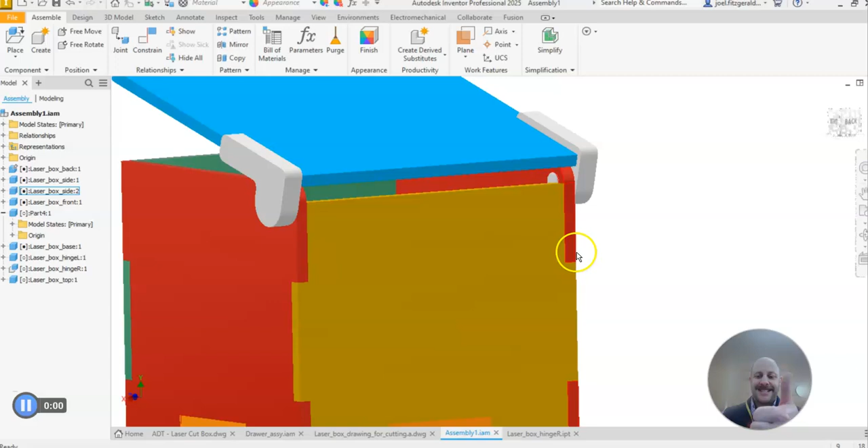In this short video, I'm going to show you how to put together your box in what we call an assembly. This is an environment that allows us to bring our parts in, check to make sure they fit together, and if you're lucky and it works well, you can also do some little animations by clicking and moving your objects.

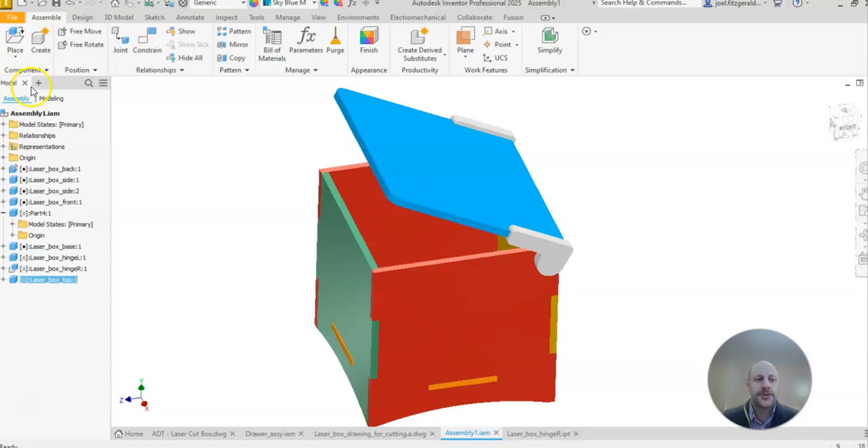To start with, you may have a file already in your file set that has an assembly on there. I'm going to show you how to create a new one. We go start with new, this little icon here. Make sure you're in metric. We're not going to create a part, we're going to come down to assemblies. So you need the standard millimeters.iam. Press create. In this blank environment, we're going to start placing our parts.

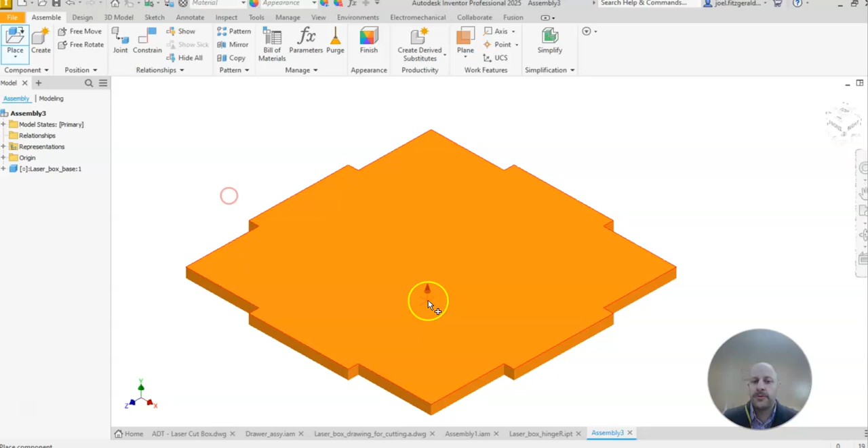So our box, you can refer to the drawing. I'd like you to start with the base. This is the base here. Let's just click and place that in our assembly. You notice the view will change to a 3D view. We need just one of these. We're going to go ahead and start adding the other parts.

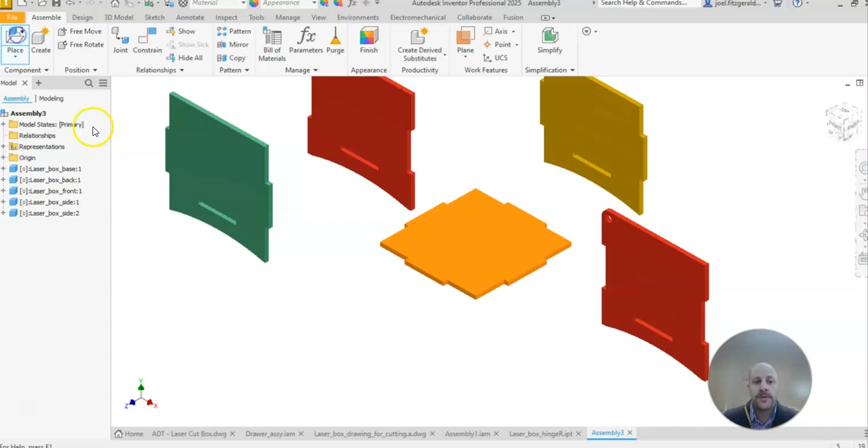So our box is going to need a back. Open this one, just place it randomly. It's going to also need a front, place it randomly. It's going to need some sides. Now remember from the drawing, there's two of these, so click 2. We also need the lid - top, or the lid we've called it. Just put this randomly inside here. And we also have a series of hinges, hinge left and hinge right. So place these in here, right click and press OK to hop out of that one.

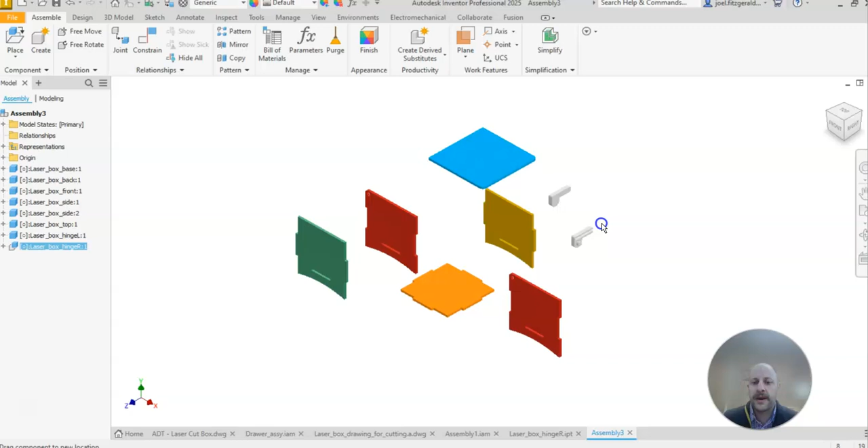You're going to see here that these are your parts. When you first put these in, you can click and move these however you would like. So it might help you to start with to move these where they are going to go. The front of the box is green, so I'm going to leave that one there. This is going to be the front. There's my base, back, two sides, and the top. There's also a command here called free rotate, so it might help you in the first instance to rotate these so they roughly look in place.

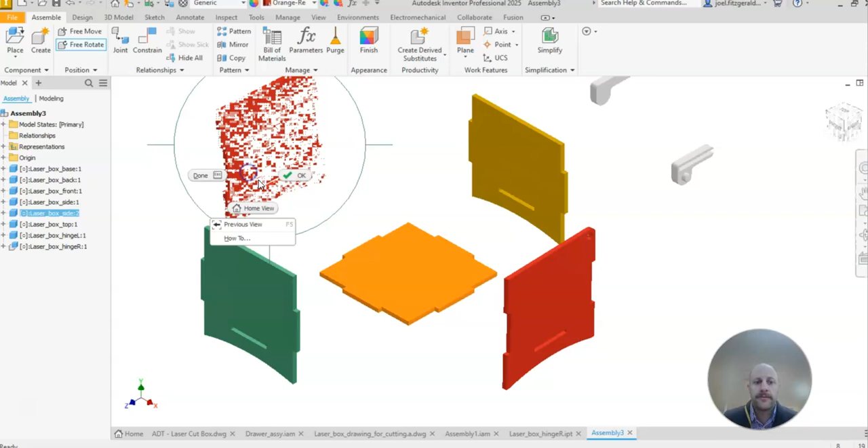So from our drawing, the hole for the hinges go at the back of the box. Right click and press OK. I'm going to free rotate, click this one and go free rotate, move that one, right click and go OK. Now it doesn't matter if these are rough to start with. I always like to get these in position so the radius is at the front, sort of how it's going to go together.

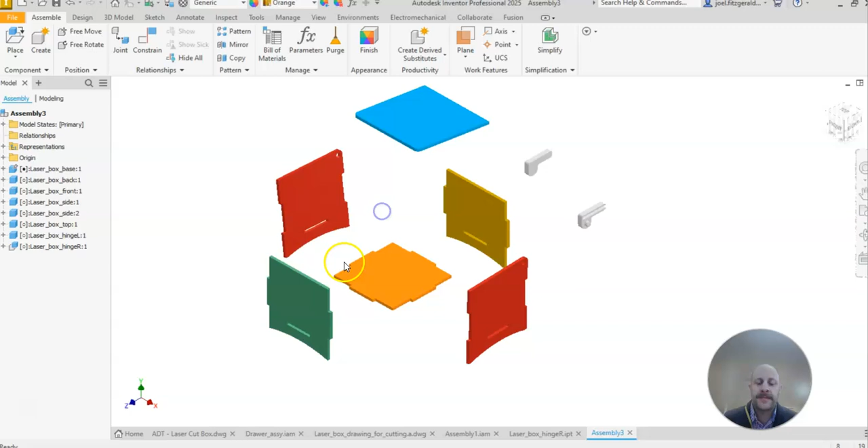Now, the first thing I want you guys to do is to right click the base. What we want to do is make this fixed. So with your mouse, right click and go grounded. That stops this one from moving and allows us to now build our box onto it.

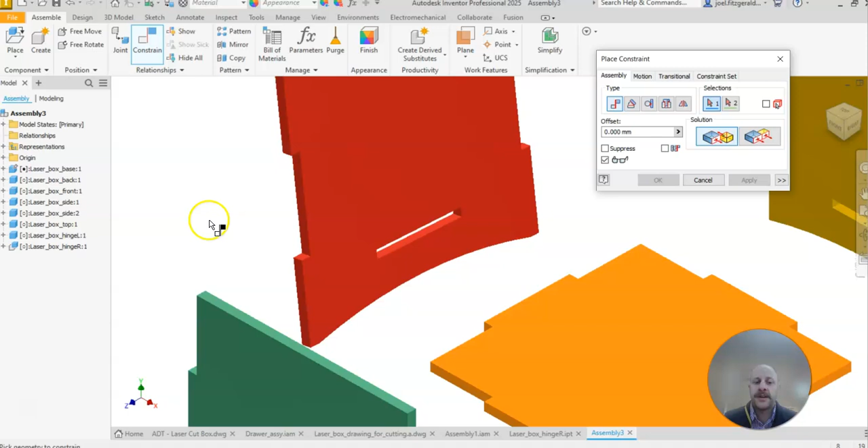So the clever tool we're going to use in here is we're going to create what's called a constraint, a whole series of constraints. In this tool is some pretty intuitive little things here. I'm going to use the mate constraint. What we're going to do is we're going to start clicking faces and create some relationships between them.

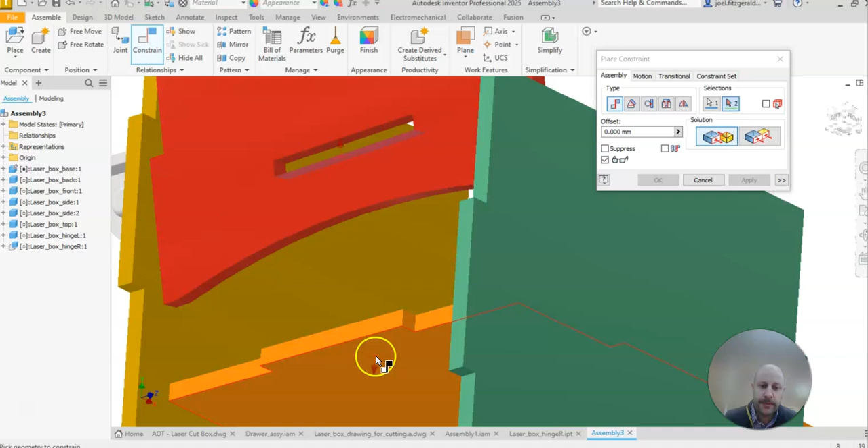So for example, I'm going to start with this side and I'm going to click, let's say this bottom face. Please be careful here, don't click on edges, try to use faces wherever you can. Now with a bit of cleverness to rotate your model, I'm going to say that bottom face is going to touch on this bottom face of my part. That's going to give you a bit of a preview. That looks good, and press apply. Now what that's going to do is create a relationship between those two parts.

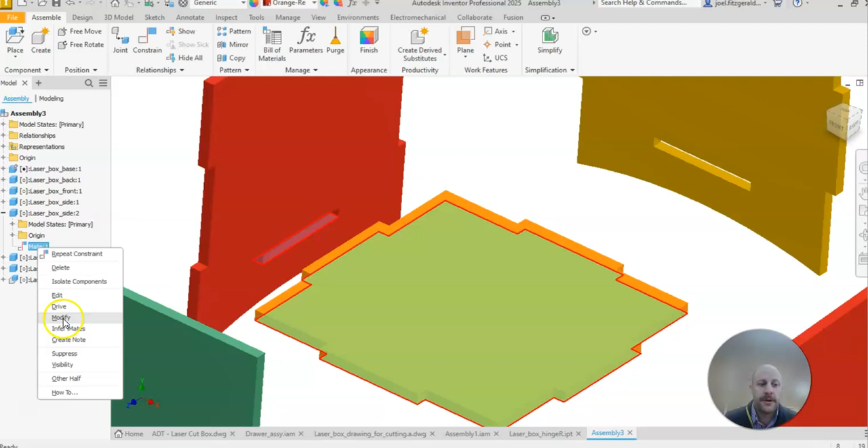If I just press cancel out of there, if I start moving this now, this is going to move according to that mate I've just applied. You can also expand here and see that was the mate between the bottom face and that face. If it's the wrong one or an error, you can always right click and press suppress - press to turn it off, or delete here to completely remove it. So what we need to do is start putting these relationships between our parts according to how it should fit.

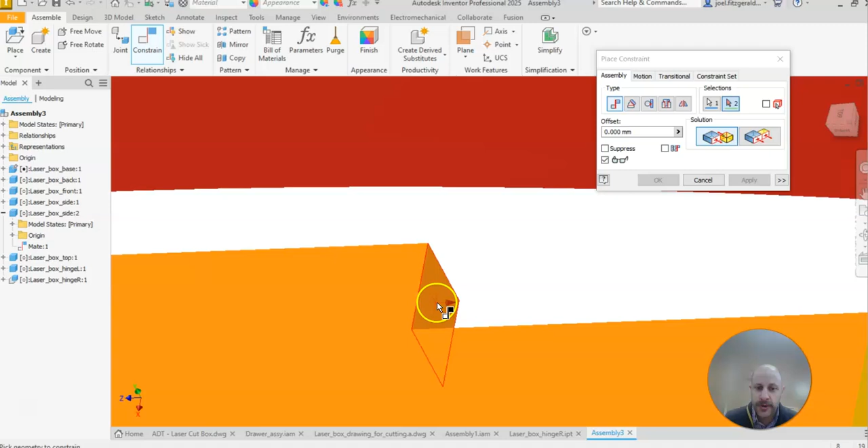So another one we're going to apply is, let's say, this face here of the side - that should be touching this face here. So remember again, zoom in, click on the face. It's going to put those together.

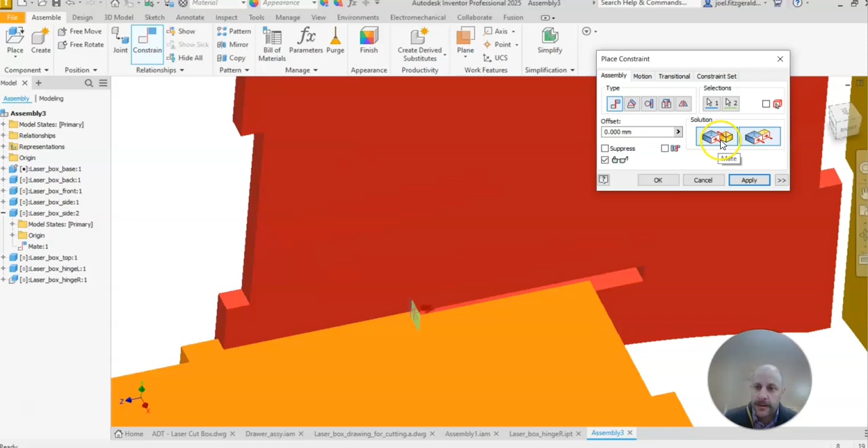Every now and then, what is possible is that there are two options for these. You can click on the two options. It's a little bit hard to maybe understand this, but these two faces can touch in two different ways - so that way there, and also if I press on the other one, it can flip it over and those faces are still touching. So if something comes out weird, try pressing on this alternate solution. That looks how I want it. I'm going to go OK.

The last one I'm going to do is say constrain. I'm going to choose this whole front face, and that whole front face will sit against here and go okay. Excellent. All right, that shows these together.

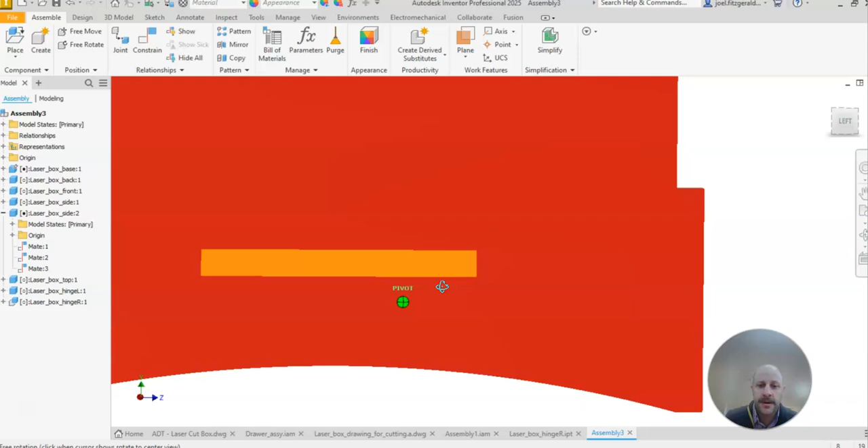You will notice that there's a little bit of an overlap with our parts. This is because when we laser cut these, I've already determined that the laser cutting lines removes a bit of material. So a little bit of interference, we call it, between these parts is okay. But what we're mainly looking for is ensuring that all the corners line up.

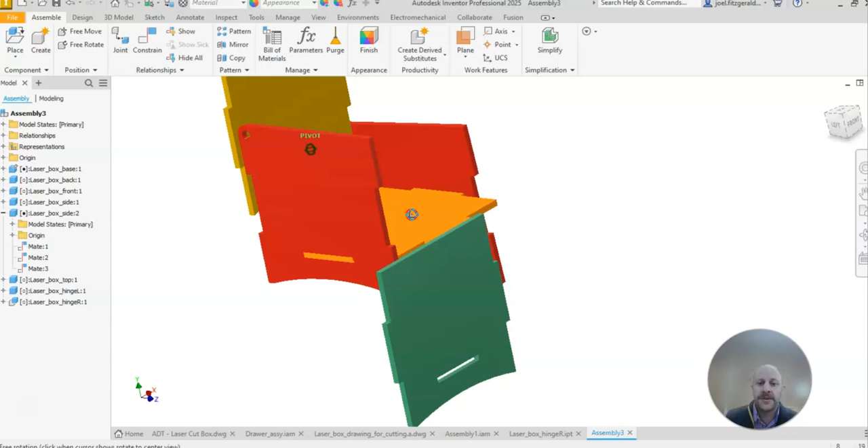Okay, so part by part, let's apply those. I'm going to do one more and then you're going to do the rest. So constrain, let's put the back piece on. So I know that, let's start with this face. That face there should be touching on this face here. Apply.

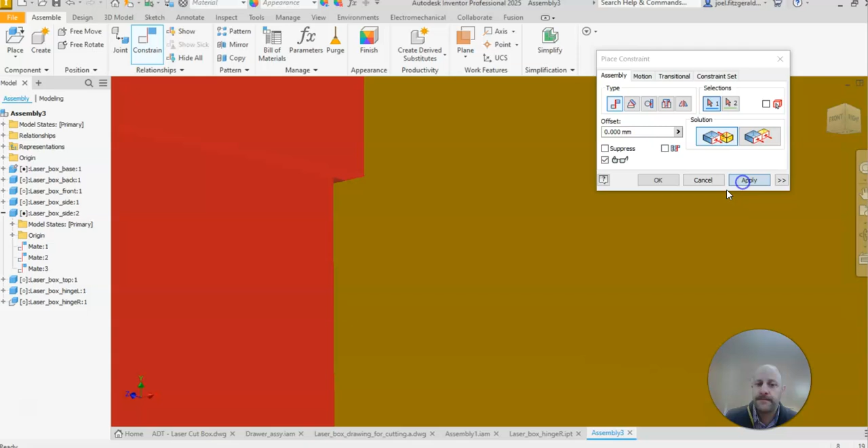What else? That face there should be, whoop, I can't quite see it. I'm just going to move this out of the way to make sure I can get to it. So this face here touches on this face here. Apply. And I can just move this out of the way.

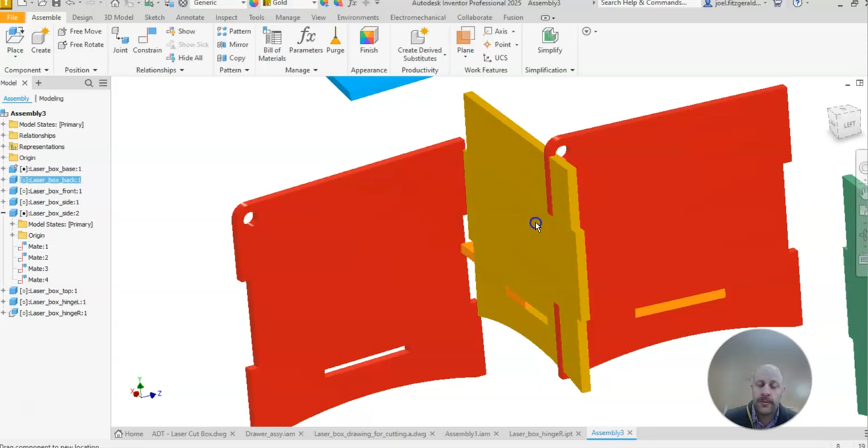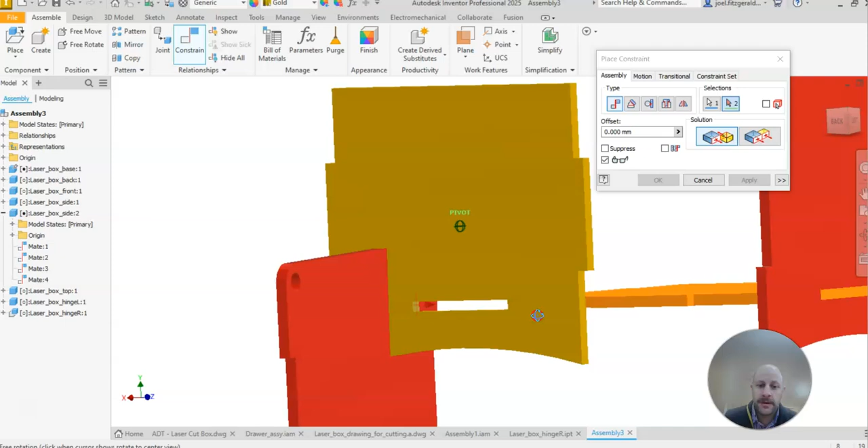You can see that there's one more constraint that I need to fix this. And that's going to be, move this out of the way a bit further. Constrain that face there. Should be touching on this face here. Okay. Cool. All right, so your box should start to be built like this.

Now you'll notice that when I've got all my constraints, if I go to move an object, it will not move if it is constrained. If it has no constraints, it will move freely. That's a pretty important tip there.

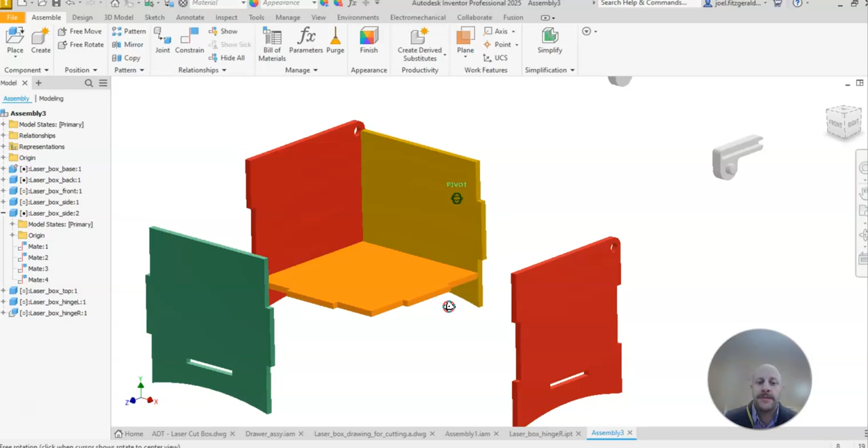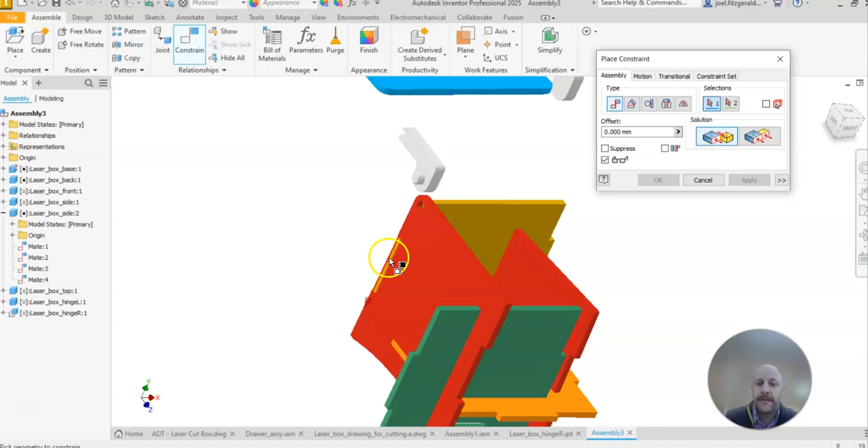So we're going to keep adding and building these. I'll show you the finished result in a second, but you're going to apply constraints so all those bits come together. These hinges are a little bit tricky, so I'm going to show you the constraint I want you to use for that. So you need to sort of work out the orientation of these, and if you make an error, don't worry, just go back. But for this constraint, I'm going to put this cylindrical face, which is this one, into this hole here. So choosing the faces, not the edges or the center.

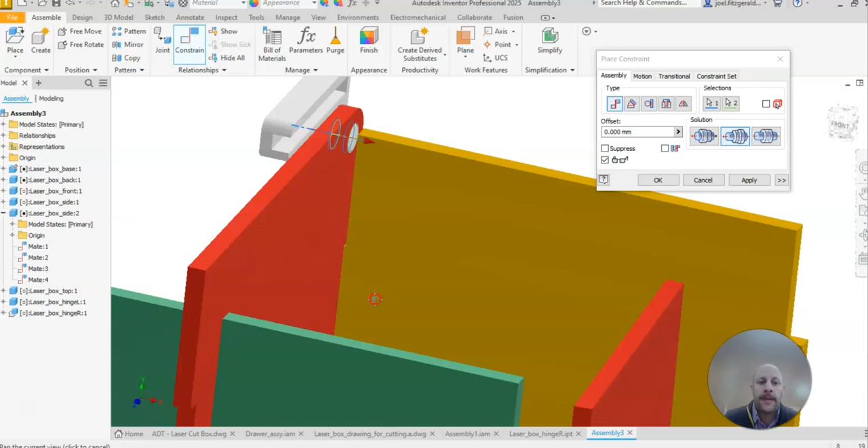Now, this is the instance that I actually want to turn this around. So I'm going to move this to that side. That flips it around, and that's what I want. So that hinge is going to go in there, apply. This cylindrical face is going to go into the other hole of this side in here. And same thing, I'm going to flip it over and go apply.

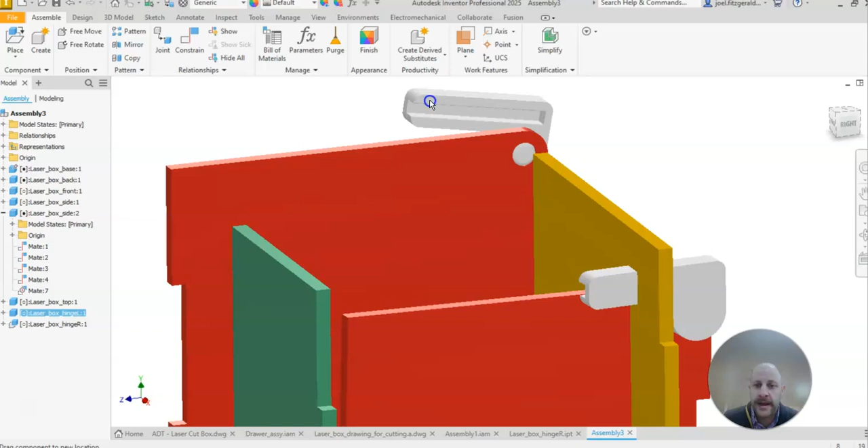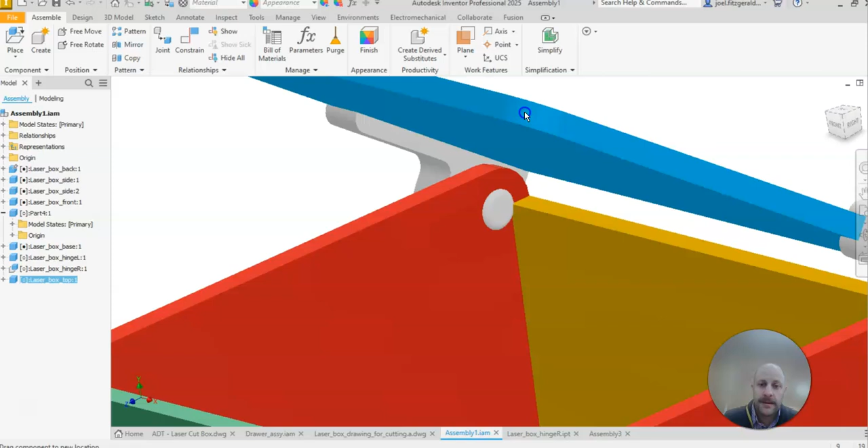And now you'll notice if I move this one, it can still move in and out, so it might need some more constraints, but using two cylindrical faces allows me to rotate these, which is pretty cool. I'm hopeful that you can keep adding more and more constraints. So eventually what will happen is when you put the lid inside these faces, you'll come across to my other assembly and you'll see here that the hinges will move. So fingers crossed your box looks like this at the end and the lid will move up and down.

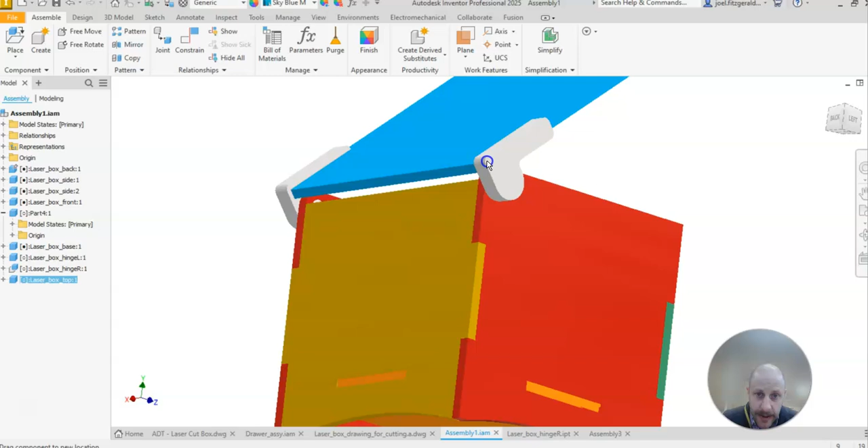And like I said, the main purpose of this is you can go through and check to make sure that this all goes together. You can actually check the hinges as well. If I rotate this, you can just see that this isn't going to run into the back of this part. So we can check what we call assembly interferences to make sure that this won't have any problems. Cool. This is a really good and important check to do whenever you build any parts, to put them together in assembly and make sure that everything works.

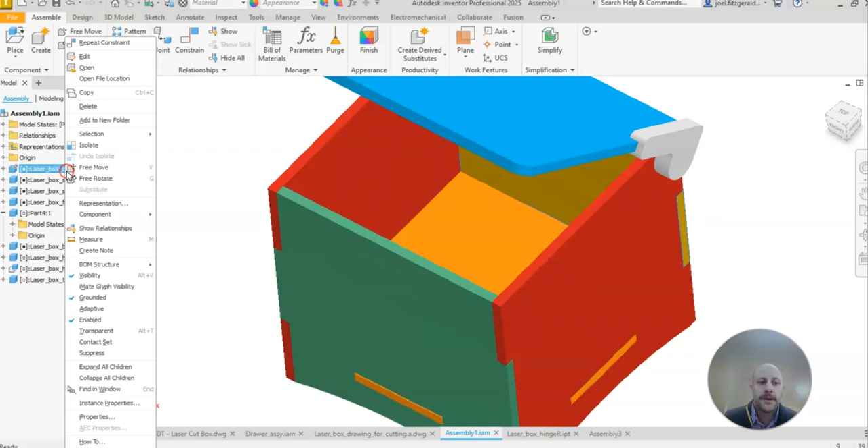If something is off or wrong, the beauty with CAD is I can go into a part. So let's say my back had a problem. I can right click and go open. I can change my dimensions on this, and this will update in my assembly. So any errors you may have made in your modeling, you can fix and you can check before we go further.